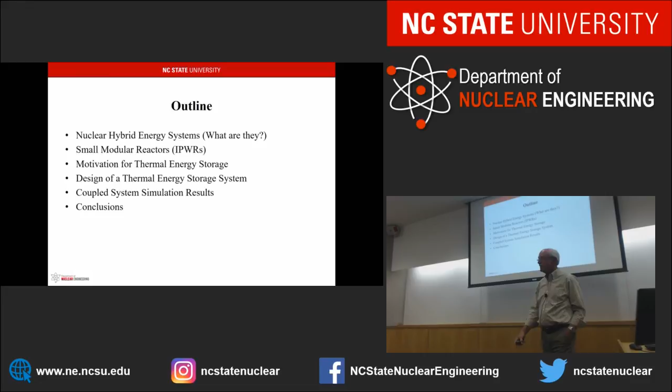Okay, so hybrid energy systems.

There is an increasing concern among some regarding climate change, and this motivated reductions in greenhouse emissions. One of the solutions that has been proposed, and you have probably seen this, is increased penetration of renewable energy sources. This can include wind, it can include solar. There are others out there, but wind and solar tend to be the ones we have looked at and that you see deployed a lot.

You don't have to spend much time driving through eastern North Carolina to see large sections of what used to be cropland now occupied by solar panels.

Consequences of that are when they put out electricity, that goes to the grid. That impacts the net electric demand seen by the rest of the providers on the grid. So this results in distortions, if you will, of the electric demand that your baseload units have to respond to.

There are also other energy needs that we have that are non-energy producing but also have a carbon footprint. For example, pulp and paper, which is a big industry in North Carolina, they need process steam. There are a number of applications in petrochemical fertilizer production, a number of processes that require process steam. So how do you get that process steam? You can burn coal, you can burn gas, whatever, but there are also non-electric needs for thermal energy.

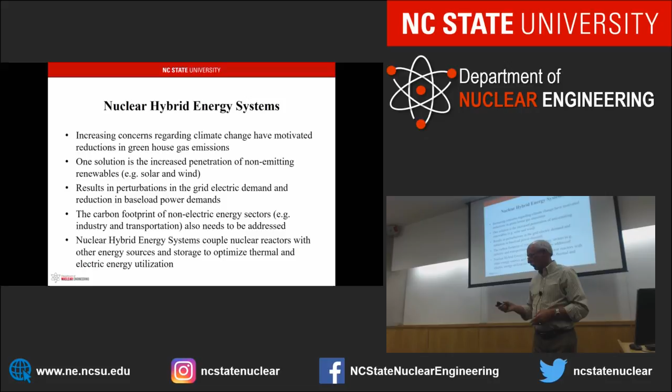And I'm a believer that potable water is going to be increasingly in short supply as we go forward. With salination of some of the aquifers and other things we're seeing, you don't have to look very far in the Southwest to see demands for potable water increasing. So consider that as one of them.

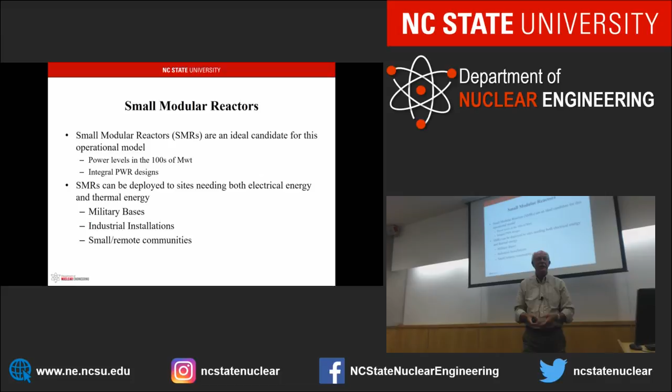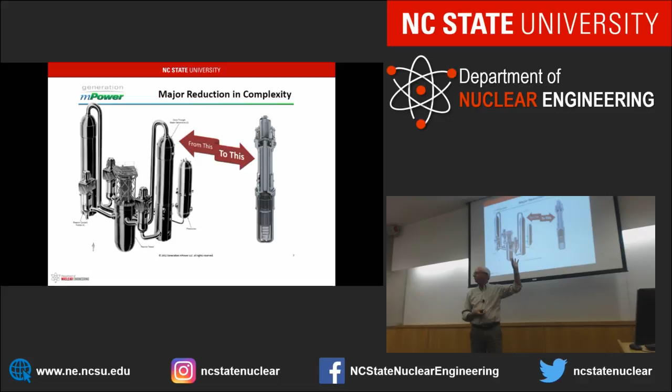There are a number of reactor designs of this type. mPower is one that was being developed by B&W. Westinghouse has their own version. NuScale has a version. But they all look like this—they all have this same sort of configuration.

If you look at this one in particular, you have the core down here. Water comes in—the flow loop for the whole primary side—water goes through the core, up through some structure here, through a riser, into this upper area. Here are your reactor coolant pumps, mounted on top of the vessel, moving the flow. Because you have this large riser, there is a much enhanced component of the flow that is natural circulation, so you don't need these massive thousand-horsepower reactor coolant pumps anymore. These pumps can sit right on top and move the flow.

The secondary side: feed water comes in and flows alongside your steam generator, so your steam generator tubes are right here inside the reactor vessel.

So the primary side comes in, runs through the tubes, then down your downcomer, up through the core, and that's your complete primary side flow loop. Secondary side comes in, feed comes in, runs along the outside of the tubes typically, and then the steam comes out. So the only penetrations to the reactor vessel are the feed line and steam line coming in. There will normally be two of these, so you have symmetry on both sides of the core. So that's what one of these things looks like.

The pressurizer is mounted on top of the vessel, so any insurge and outsurge goes into here and out. So it's the typical pressurizer behavior, but it's just mounted on the vessel. There's no separate surge line that you have there. So the pressurizer heaters and sprays are all contained in here. It's a cute little system, all right?

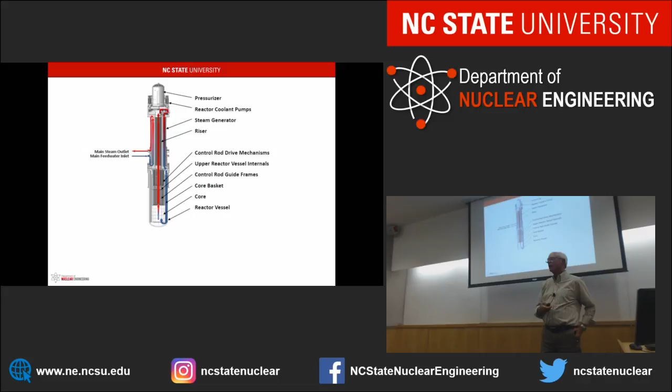Now, the difference between this system and NuScale's natural circulation system is you take the reactor coolant pumps off, and then you have a natural circulation reactor. You still have the riser, and you typically have to operate at somewhat smaller power levels if you go to pure natural circulation. But again, the design is essentially the same. There are some small differences, but the design is effectively the same. So it doesn't matter—NuScale natural circulation, mPower forced convection, Westinghouse's version—it doesn't matter.

So what I'm going to talk about here is as you increase the penetration of these intermittent, variable electric sources, the electric demand seen by the reactor side changes. It alters the load profile, meaning the load profile can be intermittent. It can be variable from day to day. You don't know what it is when you're planning, and as you add more of this stuff, you add that intermittency to the mix.

So what we want to do is deploy reactors into this environment. This intermittency you see, even if you're not talking about remote locations, even if you're just talking about deploying on a standard grid, the addition of these intermittent energy sources is having a dramatic impact on baseload plants. The electric demand—since these renewable sources are generally required to take whatever's produced by wind and solar directly to the grid—means the other energy sources have to be powered down.

There are cases in California and some other locations where there is oversupply of electricity. Production exceeds demand, and the pricing goes negative—utilities have to pay people to take the electricity they produce. That's not a good business model. There have been instances, even in North Carolina, where I've heard the production of electricity was sufficiently large that they had to down power one of their nuclear plants. There was so much excess capacity on the grid just from intermittency. Again, that's not a good business model.

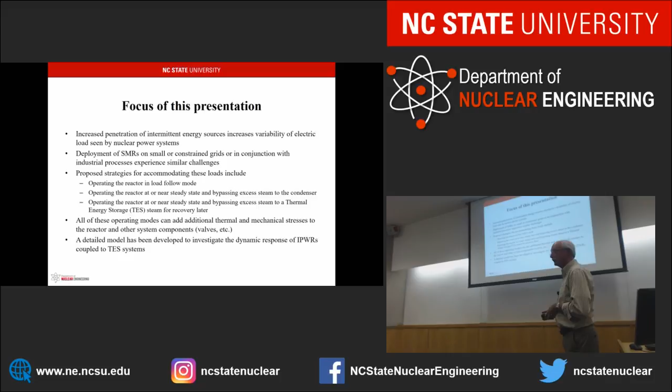But you may be willing to sell. At my age, I don't care.

Okay, so let me first talk about the systems model. The driver of this is the reactor system, which is the integral pressurized water reactor.

So we have a model of an integral pressurized water reactor. It can handle systems with both forced and natural circulation. If you simply take the reactor coolant pumps off, you have a natural circulation reactor—you have to optimize it differently, but the configuration is the same.

The models are all time dependent. You have to accommodate time-varying loads and time-varying powers. So everything is dynamic—the whole system is dynamic. Nothing essentially works at steady state in this.

As a consequence, you have to have kinetics models to generate the reactor power, and you have to have control rod banks. The model includes overlapping control rod banks that move in and out to maintain power at some programmed level. It also has xenon.

Because the power level can fluctuate, xenon production, decay, and xenon feedback have to be accounted for. Xenon has the nasty habit of having a time constant on about the same time frame as the operating history or operating period, and you can drive your system unstable if you're not careful.

We have moderator temperature and fuel temperature feedbacks, decay heat—all of those time-varying parameters you don't normally worry about, you have to model here, because you might be running these things into transients you're not used to dealing with.

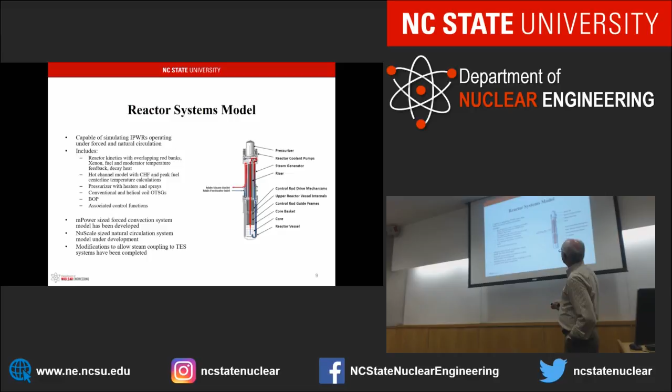Then we have made modifications to allow coupling of this thing to a thermal energy storage system. So that's what we've been doing. All right.

If you're going to bypass steam, you have a number of options. This is what makes this stuff different than doing paper reactors or toy reactors. If you're going to be doing this seriously, you have to take into account all the valves, all the motors, everything that's going to be in line if you're really going to figure out how to do this right. It's not enough to just say, well, I'm assuming the reactor will just operate at steady state. There's a lot that is required to make that statement true.

And that's where the devil's in the details. So if you're going to bypass steam, a conventional steam line has the generators go to some pressure equalization header. This is conventional. You then take steam lines off, typically there's about 4 of them, through some turbine control valve into the high pressure stage, or the impulse stage, of the high pressure turbine. That's conventional. Steam expands, you have some exhaust here that goes through moisture separator reheaters into the low pressure turbine, and then out to the condenser.

So that's conventional. If you're going to be bypassing steam, then you have a number of connection points you can choose, depending on the application, to where am I going to take the steam from. One choice is to take the steam off the pressure equalization header, prior to, upstream of, the turbine control valves.

Now the turbine control valves modulate based on what the demand is. The demand is about full power, turbine control valves are full open, and all of the steam is going down the lines to the turbines. Under periods of low electric output, those valves modulate closed. So depending on what the electric demand is and what you're trying to do on your turbine side, those turbine control valves move up and down.

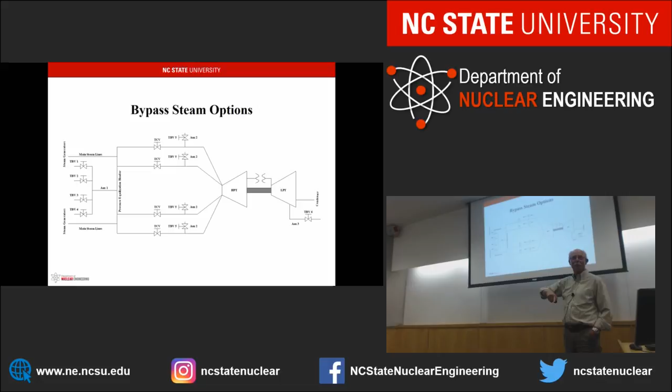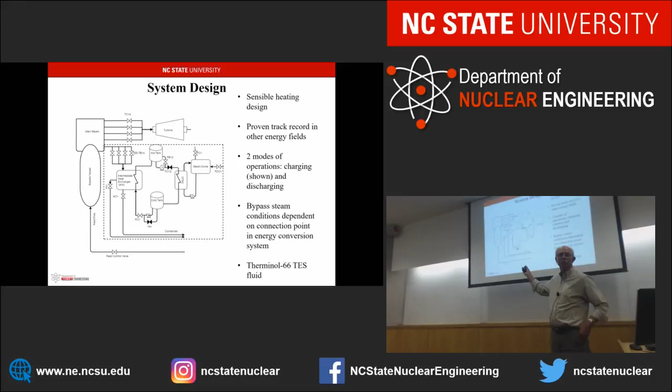Okay. All right, so don't worry about all these equations. Here's the connection point and the control strategy. Again, these control strategies had to be developed because they don't exist. So we're assuming that you have once-through steam generators as part of the integral pressurized water reactor. That's typical. With once-through steam generators, the turbine control valves act as pressure control valves. So they modulate to keep the steam pressure in the steam generators constant. That's their control strategy. So I connect to the pressure equalization header, and the turbine control valves are keeping the pressure there constant. So that gives me constant steam conditions going downstream.

So again, these auxiliary bypass valves that you see here are located upstream to provide constant pressure steam conditions. One of the nice things about this configuration also is I can bank those turbine bypass valves and cause them to open in stages. I can open them all at once. I can make them open in stages. I can overlap them, whatever is most optimal. And we've looked at all of those.

So the bypass valve, the controller to run these things is based on the difference between the measured flow and some demand signal. And the demand signal is what is required such that I meet the nominal turbine output, and also I keep the reactor power constant. So that's the demand signal. I produce a demand signal for bypass that keeps the reactor running at constant power.

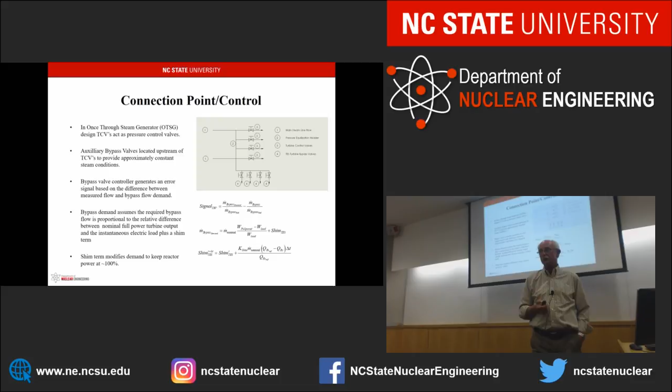So there are additional controllers for the thermal energy storage system, and again, you don't have to worry about it. The auxiliary control valve in the intermediate heat exchanger works to keep the level at some program value. That's all you need to know about that. The flow control valve, that's the valve that moves the fluid from the cold tank to the hot tank, and it modulates to keep the exit temperature of that fluid constant. So again, depending on how much bypass steam you have, it will open or close. All right. There's a pressure relief valve in there in case you pressurize the thing. Okay.

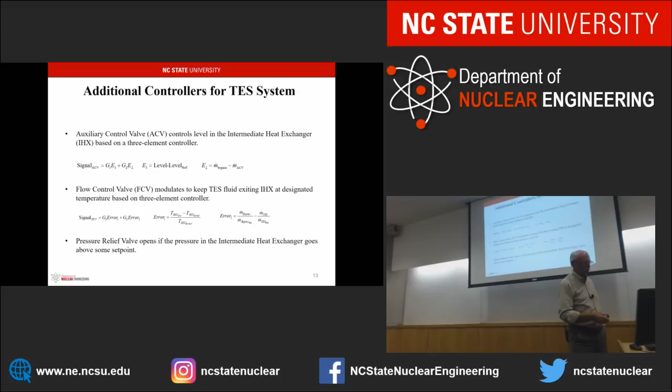If you're bypassing flow to this consideration, prior to the turbine control valves, you're limited to 45% to 50% nominal steam flow, because if you bypass more steam around the turbine control valve than you send through it, you lose your ability to control pressure. The turbine control valves are your pressure control. If you're not putting any steam through them, you can't control the pressure. So the limit is about 45%.

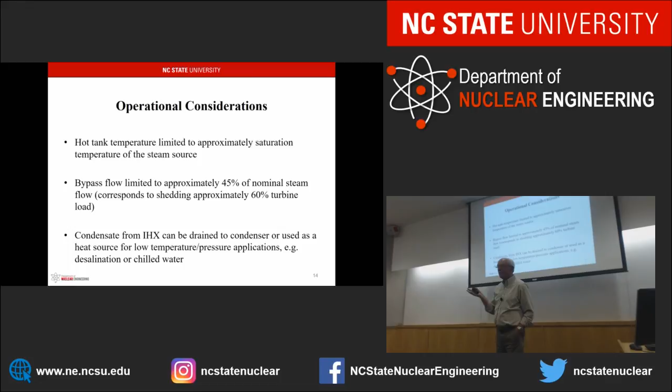Now, because of efficiency changes and so on, it ends up that you're shedding about 60% of the turbine load. So that doesn't end up, in a practical sense, being very important. One of the things that I have shown you, that condensate from the intermediate heat exchanger, you can drain it to the condenser, but as I'll show you later, that is a source of waste heat that can be used for additional applications. So there's other things you can do with that.

So let me show you some simulations here. So let's couple all this stuff together, throw it out there, and let's see what happens. So again, I'm going to show you, first of all, if you operate the reactor in this normal load follow mode. Let's say you just want it to operate as a load follower. What does it do? So the turbine control valves operate to maintain the steam generator pressure essentially constant.

Control rods move to maintain some programmed average temperature on the primary side. Feed flow modulates to try to meet the reactor demand, or reactor power, or the turbine demand. There's no direct control of steam generator level. It floats and it wanders. And then as a consequence of the level floating as a function of power, the exit steam temperature changes. All of these things are changing as a function of the load profile.

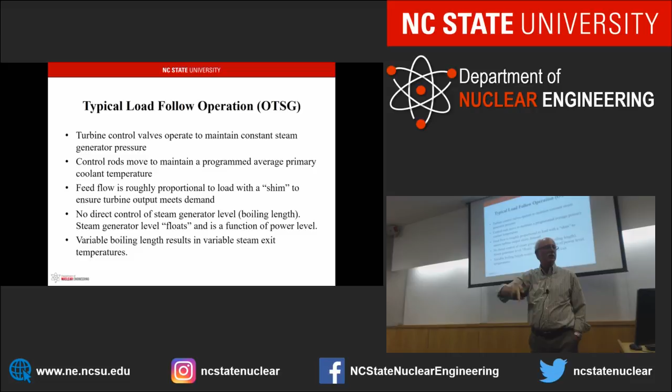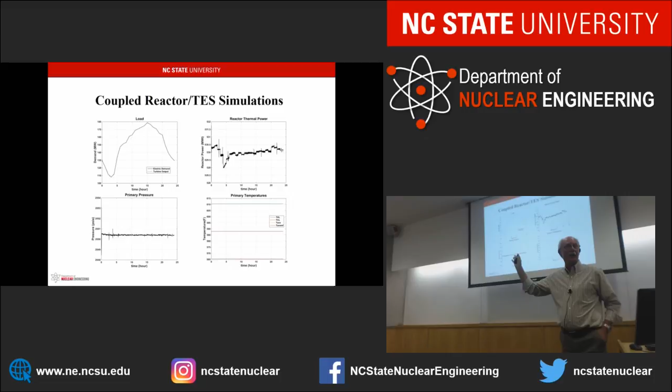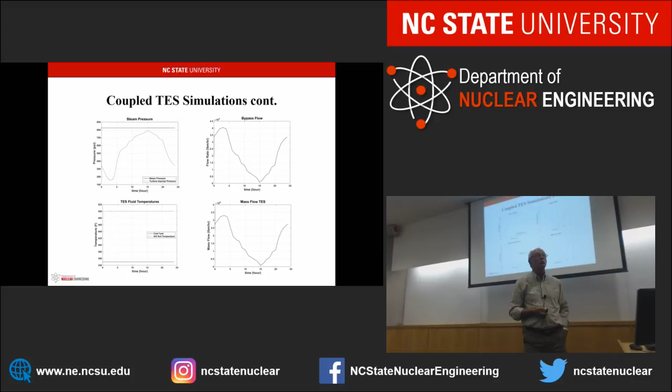Okay. The thermal energy storage, here's their flow from the cold tank to the hot tank, and it essentially follows the bypass flow. So during periods of high bypass flow, you put a lot of fluid through there. During periods of low bypass, you put a little bit of fluid through the heat exchanger, and the consequence is the controller is set to maintain the outlet temperature constant. That's pretty constant. Okay, so the controllers worked. Okay, so let me show you the discharge mode.

So in the discharge mode, you take the fluid that you have stored in the hot tank, you send it through the steam generator making steam, and then what I have shown is configuring this thing as a peaking unit. The potential exists that if I store enough steam, then during times of increased demand, I can produce sufficient steam to actually run the turbine output at higher than the nominal rated value of the reactor. You can run it as a peaking unit.

All right, so you store excess capacity in times of low demand, and then you recoup it later, generate steam, reinsert it into the energy conversion cycle, and produce more electricity. And so you can run it as a peaking unit. So that's the way this thing has been configured. You have to choose a reintroduction point.

I chose to put the steam back in at the high pressure turbine exhaust upstream of the moisture separator reheaters. I let the moisture separator reheaters equalize both streams because the exhaust from the high pressure turbine may not have the same conditions as the steam coming from the steam dome. I put everything in, let it mix up, put it in the moisture separator reheaters, so what goes in the low pressure turbine looks all the same.

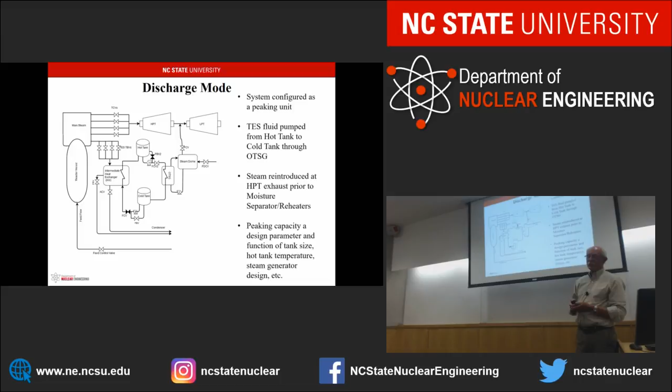And then you can choose whatever peaking capacity you want. All that does is impact the size of the heat exchanger that you have. You have to design the heat exchanger, design the size of the tanks in order to do this. So does this work? Well, if it didn't, I wouldn't be doing it. We'll skip this. I'm running out of time. Let me show you the results.

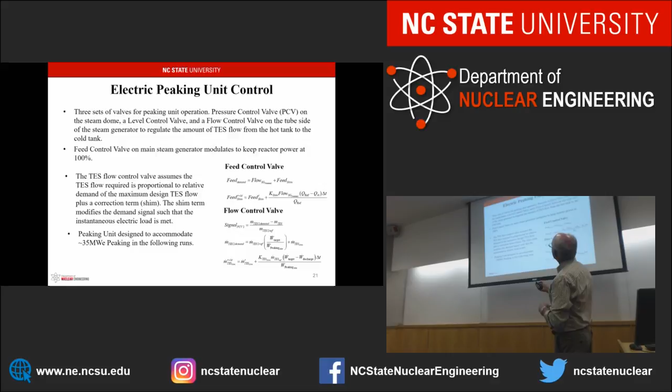All right. So in this system's nominal conditions, the conventional system was 180 megawatts electric. The system's nominal capacity would run at a 530 megawatt thermal reactor. 180 megawatts electric is nominal. So what we said is we're going to design the peaking unit side. We're going to design the thermal energy storage, the intermediate heat, all of this stuff to provide 35 extra megawatts electric capacity.

Now in order to do this, you'd have to size your turbines and everything downstream to be able to accommodate the additional capacity, but that's fine. Oversize the low pressure turbine, oversize the generator to accommodate the extra load. So that's easy.

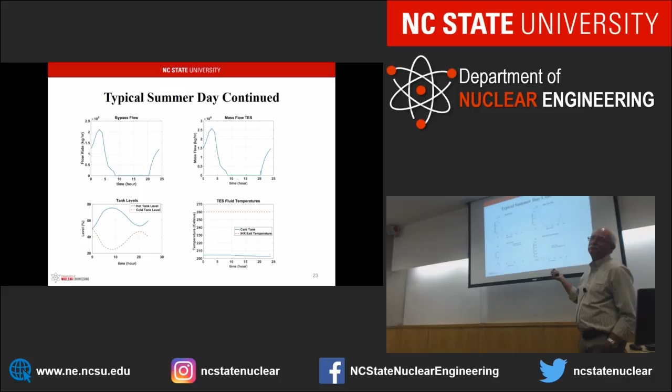Okay? So it worked like it was supposed to.

Now, what about if you put in solar? The peak solar output tends to occur during that time of the day, during the middle of the day, in the afternoon. So what that does is this is that typical summer day profile taking off solar generation of about 15%, and it alters the load profile.

So you take that same system and you run it with this load profile. During this entire time you're charging. You discharge as a peaking unit. When the solar fails, you have additional demand, and then you're charging here. Again, the reactor power is effectively constant.

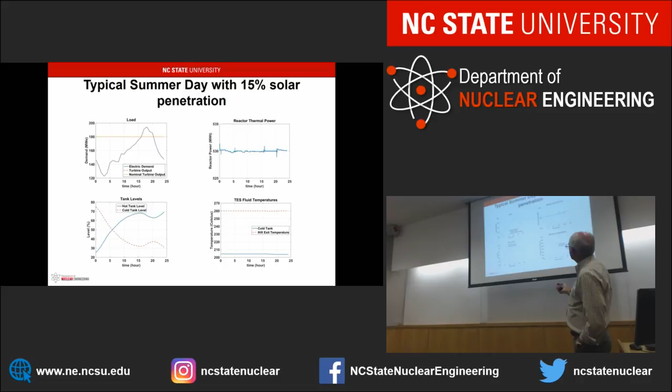Here, what you see is that you're having much larger charging cycles, so the hot fluid tank level goes up further, and again, the fluid temperatures in the tank are constant. Let me move on, I'm running out of time.

Question: can part of the solar power, in electric, go directly to the storage, the energy storage? You could send it to an electric storage, yes. Or what you could do is you could run it through electric heaters if you wanted to. There are combinations, there are lots of them.

Okay, so this is 3 days. Again, the problem is, if you're going to size one of these things, you have to take into account that this is going to be cycling over a number of days. The solar profile and the load profile does not have to be the same on every day. So while we have not optimized the system for all possible considerations, we did look at running it for 3 days, where the first 2 days are the regular sunny summer day with solar, and the third day is cloudy, so you get 10% of the solar, you don't get all of it.

And you can run any scenario you want. All that does is you pick a scenario and a time frame, and then you have to design and optimize your system to accommodate that. We didn't try to do that—that's a whole infinite number of PhD theses in doing that.

So for the first two days, you see the level in the hot tank cycling, and on the third day you're not producing nearly as much solar, so you got a lot more discharge from your thermal energy storage system. You still match the load, the electric demand. You're able to handle the peaks without any issues. Reactor power stays effectively constant—this is a 72-hour run, and the rest of this is, again, fairly dull.

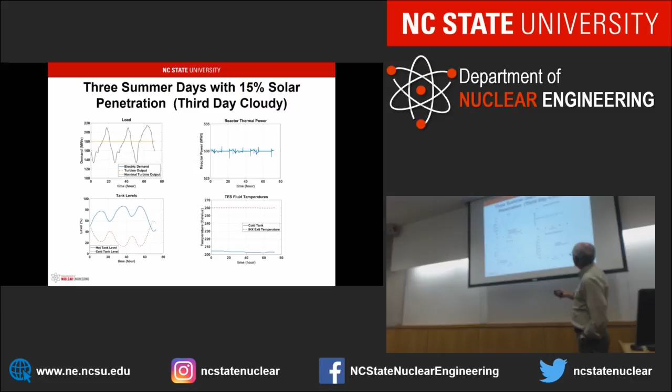And you have to figure out how to optimize the system. That's a big design problem, and we didn't try to address that. We just said, can we make it work at all? If it doesn't work, then you can't optimize anything. Okay.

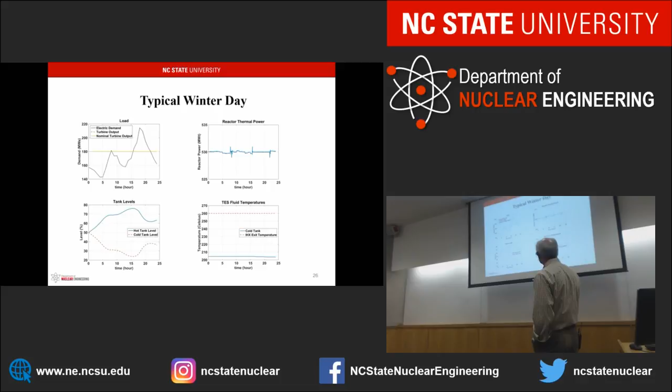Suppose you wanted to, instead of making electricity, you wanted water. So what I'm going to do is use my reactor to make water, by running a multi-stage flash desalination plant. They require constant steam, they don't want time-varying steam. They want constant steam supply. Well, what I have to do now is meet my electric demand.

I've got some electric demand I want to meet, plus I'm going to provide steam at a constant rate to some chemical process. So I've got two things going on at the same time. I'm running my plant, and I don't have any peaking unit here. It tops out at 180. I run my plant to make electricity and meet the electric demand.

And during periods of excess capacity, I store steam in my thermal energy storage system. I don't store steam when I don't have excess capacity, but I am running the discharge and the charge continuously. The discharge is always running because I've got to be making steam all the time. So I use the thermal energy storage system as a buffer. During times of excess capacity, I charge up or try to charge up the hot tank, but I'm always discharging it, always discharging it.

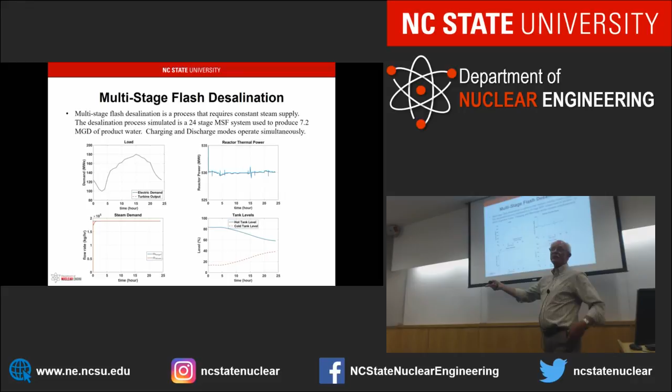Now, we have collaborated with some of our colleagues in mechanical engineering, and one of the applications they have is producing chilled water for facilities. What you typically do is run steam through some absorption chillers. You store chilled water in a stratified storage tank, charging it up with cold water during periods of excess capacity, and then send cold water to meet your cooling facility load.

Now, the original idea we had was to connect this to the low pressure turbine tap because that's low pressure steam. The problem was, as you cycle the load, the conditions going in here were varying all over the place, and it just didn't work. So we said, okay, that's not a good idea. Are we doomed? Well, no.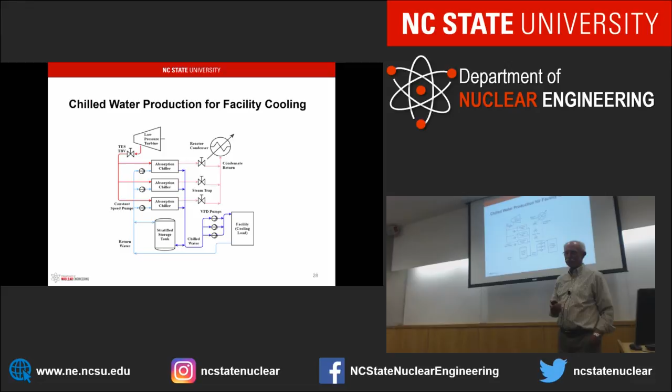During, I think it was Connor's preliminary exam, I said, we've got all of this water sitting in the hot well, intermediate heat exchanger, that we have been sending just straight to the condenser. That stuff's at 700 psi. It's saturated liquid at 700 psi. I make a lot of it during periods of excess capacity. I don't make a lot of it during periods of high demand. That's perfect. That's exactly what you want to do.

So you drop the water across some low let-down orifice to a flash vessel. You take the steam, and Connor came up with this configuration. You run it through some valves, take what you need to run to the chillers, and provide essentially constant steam to the chillers. You bypass the extra steam to the condenser, and take the liquid and run it to the condenser as well.

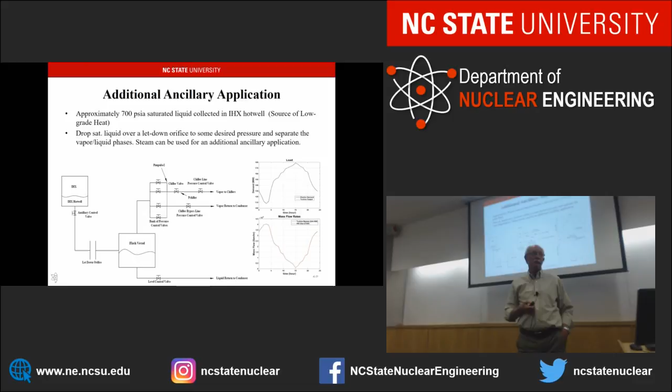The mass flow going in here, again, you have a lot of mass flow available during periods of low demand, and you don't have much during high demand. It's exactly what you would like. Now, does this work? Okay, so this one's busy, but it's fun. So here's what we've got going on.

During periods of low electric demand, I'm charging the hot side of the thermal energy storage system, charging up the hot tank. I'm taking the condensate from the intermediate heat exchanger and charging up the cold tank for the chiller, that stratified storage tank. I'm running my absorption chillers at full capacity and charging up the storage tank.

During this period, I'm running my peaking unit, so I discharge the thermal energy storage system to produce excess additional electricity. I also discharge the cold stratified storage tank to meet my additional cooling demands, which occur during the hottest part of the day. So all of those things are occurring at the same time.

Closing, you're slinging water and steam everywhere, all at the same time. Does it work? If it didn't, I wouldn't be here.

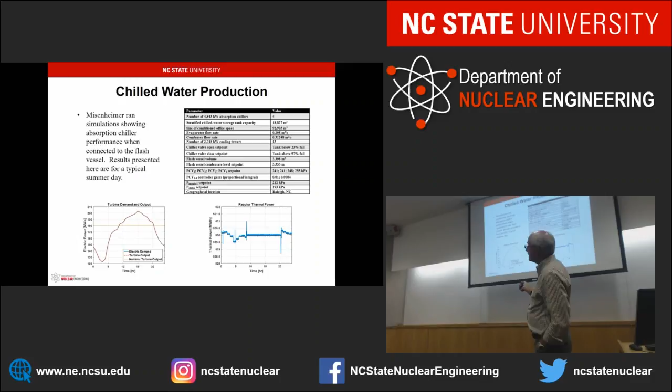So the reactor doesn't care. The reactor operates at essentially constant power. I've already shown you that the peaking unit part works, so we're able to meet our electric demand.

This shows you the bypass flow going into the intermediate heat exchanger. Part of that steam goes to running the absorption chillers—that's the steam I need going to the absorption chillers. The excess capacity I send out through the bypass lines.

So the chillers run at 100% capacity while the cold water tank fills up. It gets to full capacity about here, and the chillers cut off. Then this is my facility cooling demand—during the hottest part of the day is when the highest cooling capacity is needed, so the chilled water tank is discharging as I meet my cooling water loads.

I'm running my peaking unit during this period. Then once I get on the downside of my demand curve, I go and start charging the cold water storage tank back up, and start charging back up my thermal energy storage system. So all of this is going on at the same time. I would submit to you this is not a steady state system.

So you can couple this thing and couple all of these different processes at the same time. And your deployment strategy is completely different—obviously the optimization strategy depends on what your application is, and there's no one size fits all.

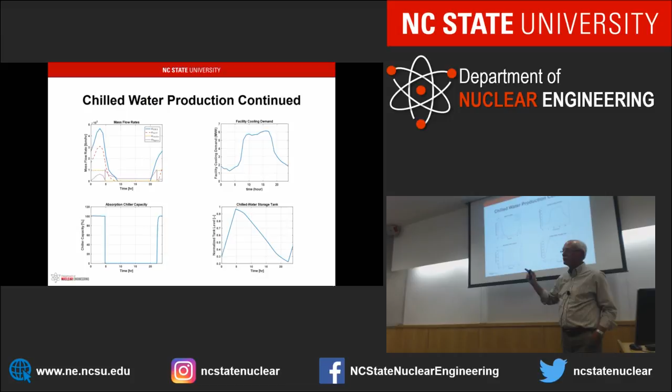So, conclusions. I am going to finish on time.

What we've done, I hope, is demonstrate the feasibility of these systems. You can couple small modular reactors to thermal energy storage systems, and as a consequence, minimize power swings. You can minimize thermal and mechanical stresses on the reactor side by buffering all of those perturbations before they get to the reactor side. So you minimize thermal stresses, mechanical stresses—and that doesn't mean you get rid of them.

Something that might be easier to get at—you could take it out of service, and the plant's still running. You could get at it, have parallel trains, take them out of service or whatever you need to do. So you've moved those stresses to the less vulnerable part of the system.

You can accommodate and minimize the effects of various levels of renewables because the system can be sized to accommodate any potential load profile you want. In fact, the load profile can be chosen not to meet the electric demand, but to meet some price structure.

So for example, if you have a situation where electricity has time varying rates, then you store energy during periods of low demand and generate electricity out the yin-yang during periods of high prices. Your demand profile can be set by price, not by what the electric demand is. You can let some other resource—natural gas, for example, which is cheap—meet the electric demand during periods of low prices, and then run your more expensive generators, store the energy, and recoup that later.

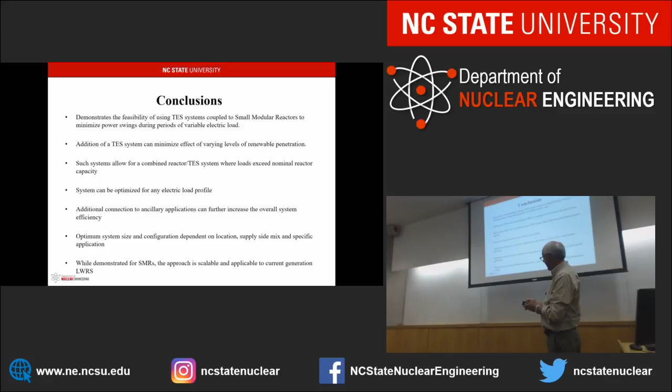With that, I'd like to acknowledge my colleagues in mechanical engineering. Corey Misenheimer, now Dr. Corey Misenheimer, developed the absorption chiller models and the stratified storage tank models, working with Dr. Steve Terry in mechanical engineering. Corey and Connor worked together on the configuration for the flash vessel, so Connor could provide the control strategies needed for the steam going to the absorption chillers. Corey then used our models to do his optimization work. I want to acknowledge their contributions to this.

And with that, I'll answer any questions you have.

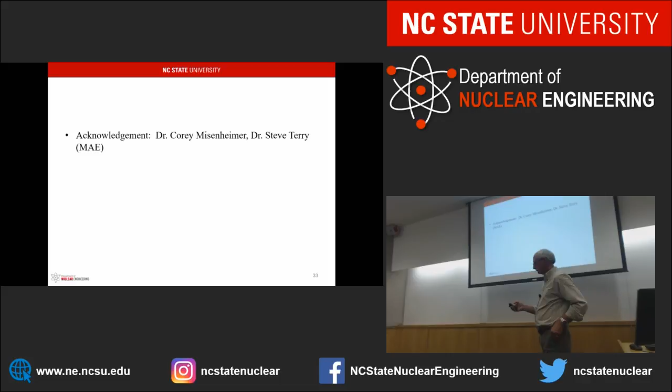Since all of this affects the reactor, which part of this would be under the jurisdiction of the NRC for regulation? Anything that connects—I'd say anything that connects to the balance of plant.

In fact, what I didn't show is that because you've connected this to the balance of plant, perturbations or failures in the thermal energy storage system feed back through the balance of plant to the reactor. So Connor did a limited accident analysis to show what happens if you failed one of the feed valves, or if one of the turbine bypass valves failed open, or if all of them failed open. The answer is they don't provide anything you can't accommodate within your current reactor safety system.

They don't, because opening the turbine bypass valves for this system doesn't look that much different than the normal turbine bypass valve opening you already have on the system anyway. It may be a different magnitude, but you're able to accommodate it. We've done limited analysis, but you'd have to incorporate that into your failure modes and show this doesn't add anything additional. So you don't need any extra hardware?

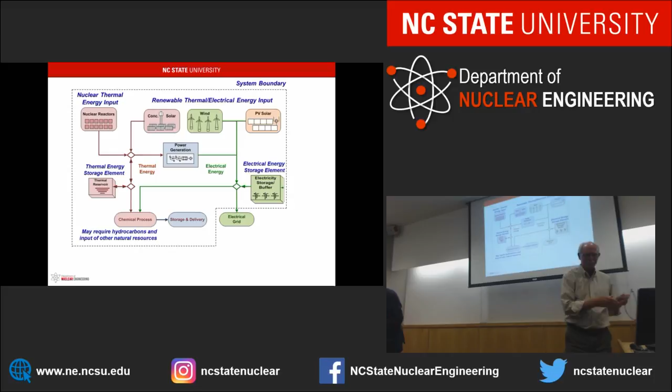I was raising up my hand, but— Oh, I'm sorry. It's fine.

I'm just thinking, if the starting point of this research is basically just the project which we did—we had the nodal points, like 1D nodal points in the core and the steam generator, and then we have the velocity and temperature coupled solver, and then we just add the electricity models, load models, and all the additional models needed for the...